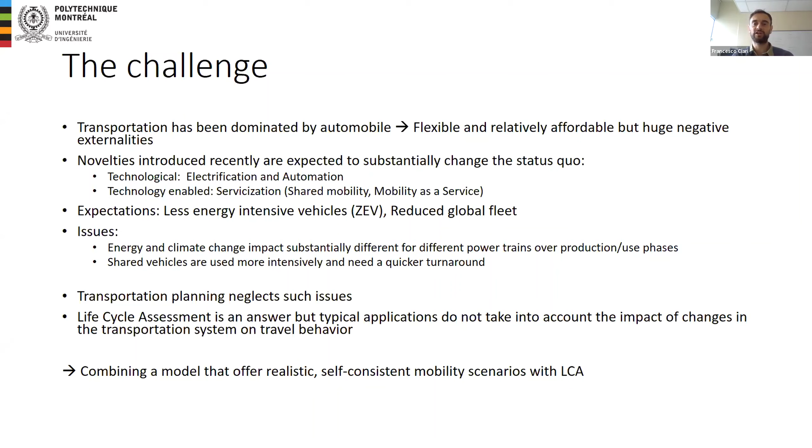On the other hand, we have something some of the audience is probably more familiar with, life cycle assessment, which is an answer to some of these questions, but typical applications in this field don't take into account the impact of changes in the transportation system and then on travel behavior. So the idea we had is to try to combine these two approaches. On the one hand, have a model that offers realistic and self-consistent mobility scenarios, and on the other, we have life cycle assessment.

So the methodology, more in detail. Basically, we start from a vehicle inventory. I got this term from LCA, but here it means really creating a scenario. Sorry. Okay. We create a scenario with certain types of vehicles with certain characteristics, and characteristics means obviously in terms of consumption, which was of interest here. Then we use a transportation model, and in this case it is an agent-based model, and I will explain in a second what it is, which is called MATSim.

And then we will have some results in terms of traffic flow and all these kind of things, and we'll put this into a life cycle assessment model. In the end, we will have individual impact, in terms of vehicles, and then we can aggregate both over a full, entire scenario, and also over time. I will explain what I mean by this.

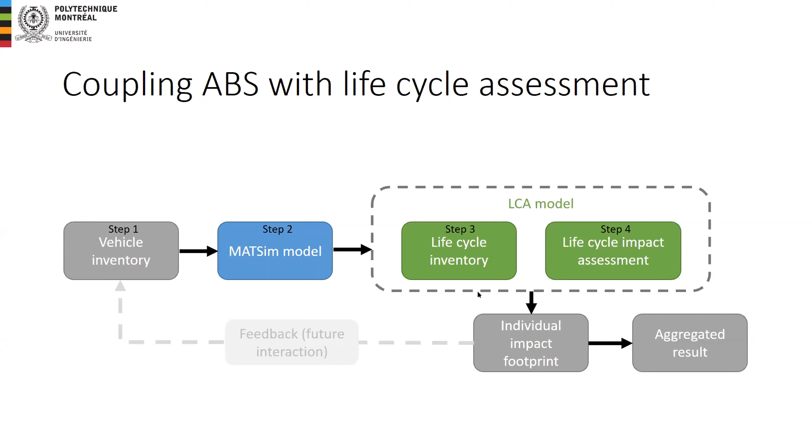All right, so here you see the main model. This figure describes better how this model is functioning. I don't think I really have the time to go into detail, but the important thing here is...

We are representing travelers at an individual level, with an iterative process within the model which allows individuals, described through this paradigm of agent, to decide what to do. Basically they have something available for them, meaning different mode options, and then they decide what to use according to what is good for them. In the end, we have an equilibrium, and this is what creates realistic and self-consistent scenarios in terms of transportation.

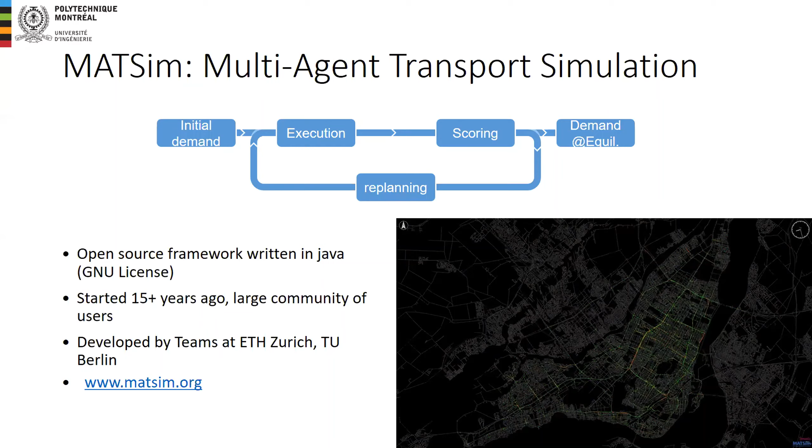Okay, then this was the transportation side. Life cycle assessment, let's say, it's something that is more well known, but in any case, very short.

I will remind people to please keep your microphone on mute. Would be a good idea, yes.

So LCA quantifies the environmental impacts of a product based on a cradle to grave concept, basically all the phases of the life of this object. I'm not going more into detail on that.

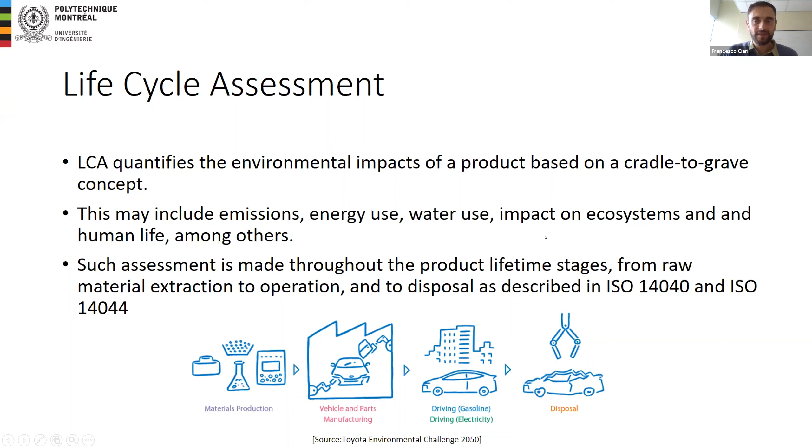So concretely, what do we do: at step one, we have this vehicle inventory, and all the relevant characteristics of the models that we use in a particular scenario. Then we have this agent-based simulation, and in the end we have a traffic outcome, and then we can calculate the consumption in terms of energy, the use-related consumption.

Then at step 3, we will add the other life cycle stages, for example manufacturing, maintenance, energy storage, etc., which is based on EcoInvent, which is an inventory especially conceived for that. In the last step, we can add it all up, and then multiply according to distances in the simulation and aggregate however we want, basically.

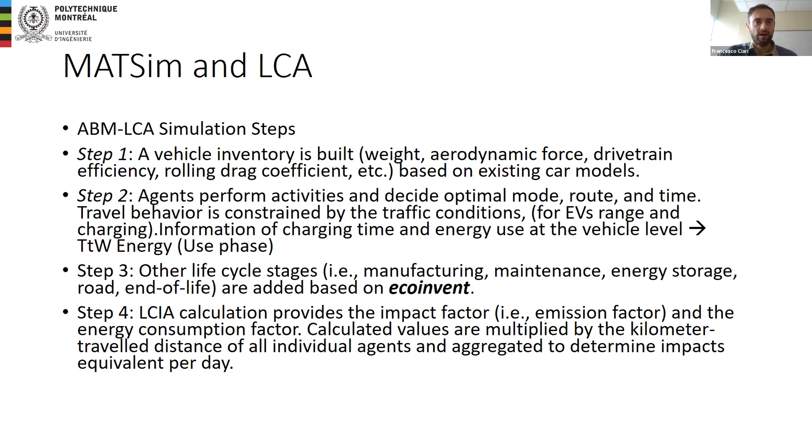Now, the scenarios we simulated for this particular project: we had 3, for the island of Montreal. We had a baseline scenario, which is the current situation more or less, because the latest data we had is 2013. We'll have soon 2018 - we are basing our work on travel surveys, and they come out every couple of years. That's how it works.

And then we had an EV scenario and then a shared EV scenario. I will give a few more details about those two.

So in the EV scenario, basically we checked, according to a certain realistic range for vehicles, how many of the trips within the island of Montreal were within this 150 kilometer threshold. Basically the large majority of them was within this threshold, so most of the people were assigned electric vehicles.

Then we considered just one model - for simplicity, we didn't have so much time here, but we can consider many different vehicles in the same scenario if needed, if we have time. And then we added charging stations, because obviously we are taking into account that cars are discharging and then need to be recharged.

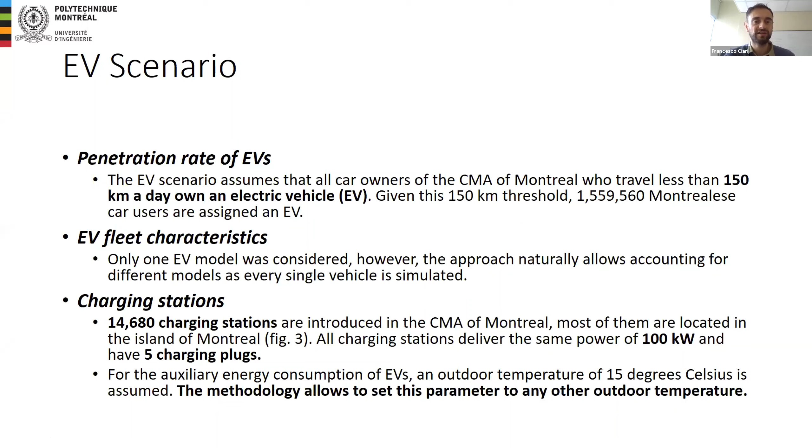Consider also that we had a particular temperature we considered, because it has a huge impact on the discharging, as I think you all know. But basically we can consider any particular temperature, even different temperatures over the day and this kind of thing.

For what I call here car sharing, the shared electric vehicles, we assumed more than double the real numbers in terms of car sharing membership for Montreal, and adjusted the car sharing supply accordingly. We had both two-way and one-way car sharing in the simulation. Here you can read the different characteristics of the vehicles, and we also based some of the network characteristics on Communauto, which is the operator here.

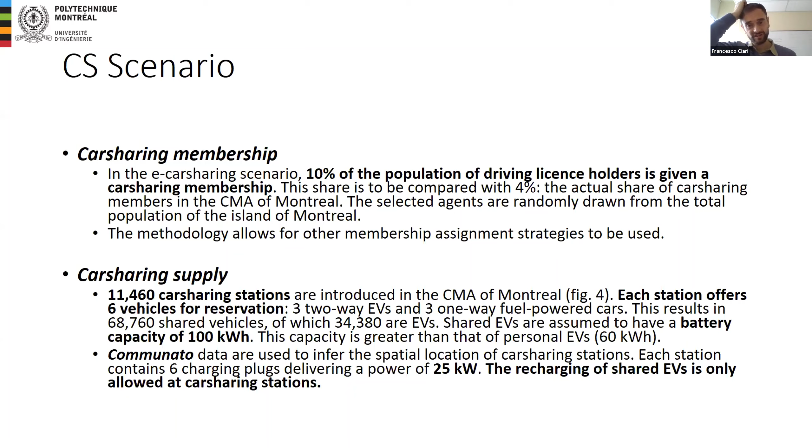All right, so some results. I think you understand with this kind of approach, you can have a lot of different results, also simply in terms of, I mean, on the transportation side. Here, I'm really showing only what's coming out of the LCA process.

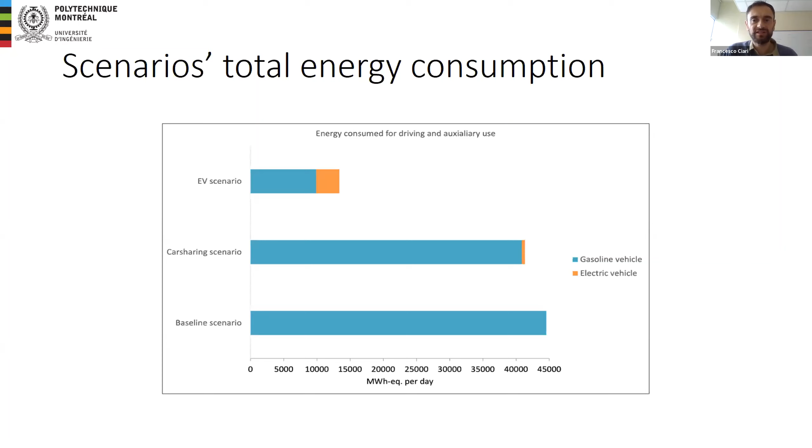So the first one you're seeing is the total energy consumption for the 3 different scenarios. What you can see here is that the electric vehicle scenario, as you are substituting basically almost all gasoline vehicles with electric vehicles, is the one performing better. Then you have the car sharing scenario, and then obviously the baseline scenario. I will give some more details on this.

If you go on a single vehicle level, but over the life cycle, that's what you have. So in terms of energy, here on the left, you can see gasoline, electric vehicle, and shared vehicle. Shared vehicle and electric vehicle are basically the same vehicle, but since over the lifetime the shared vehicle is used more, and we are considering 10 years of lifetime here just to do this comparison, obviously the shared vehicle has a lesser impact.

If I take out of the left side graph only the non-renewable part of the energy, that's what you see on the right. And here on the right is not only this, but also you have this for all the different phases of the life of the vehicle.

One thing you can observe immediately, as we all know, is that what is used during the use of the car, so during the travel, is the most important part for the gasoline vehicle, and is practically zero for the electric vehicles. But you have other phases which have a larger contribution for electric vehicles.

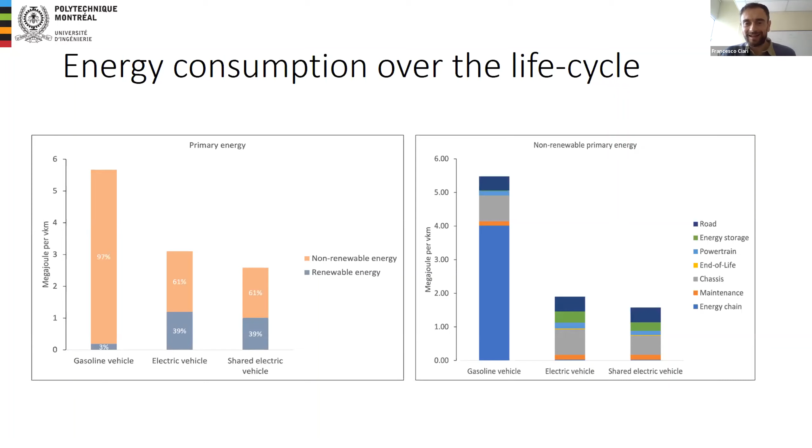All right, but up to here is just like a normal LCA, but with, again, in the back we have nevertheless this realistic simulation, which we don't normally have necessarily—never mind. An additional thing which is very important, and what I'm showing here, is that the previous graph was on the basis of these 10 years.

However, shared vehicles need to be changed quicker, exactly for the reason that they're used more intensively. And this is one of the reasons why I want to do all this, right? Here we see what is the impact of this on a single vehicle level over the 10 years if we change the fleet of the shared fleet every 2 years, every 4 years, every 5 years.

And so you see, obviously, you have a much larger impact. This is very important because, well, first because you need to do these kind of turnarounds, and this is really something that gets completely lost in the discussion usually.

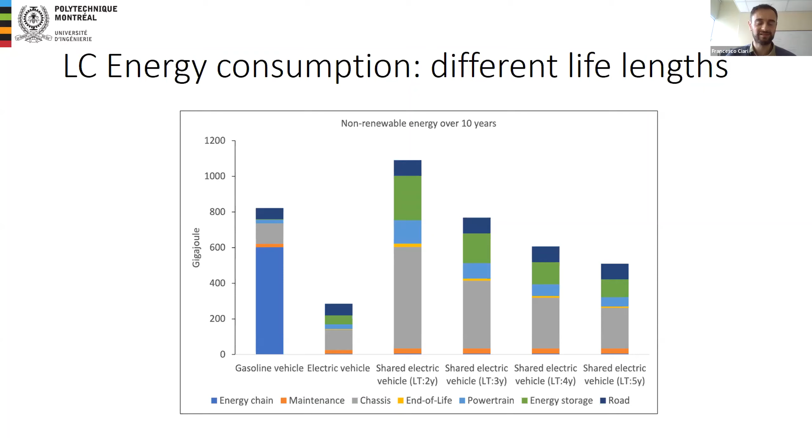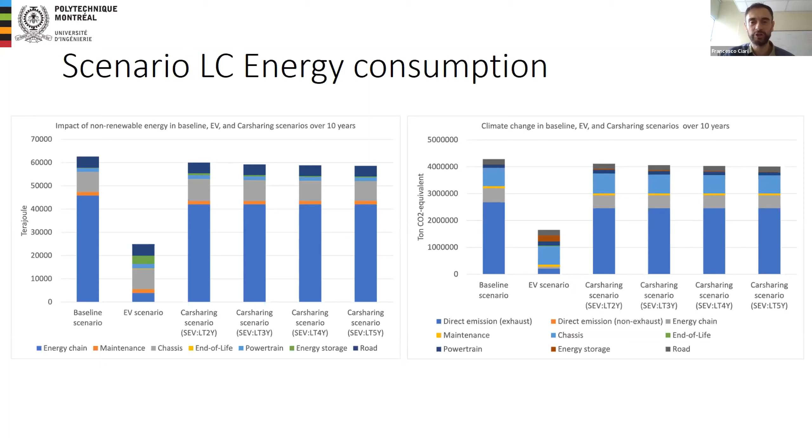If you go to the scenario level, the picture is very different. The car sharing scenarios we were representing still perform better than the baseline scenario, but obviously the EV scenario is much better still. Here you have both energy and also climate change. I'm not going into detail—we don't really have time for that—but that's obviously something you can do and usually do with LCA.

All right, so a short discussion. As I was saying, between the scenarios, the one with large EV fleets is the one performing better. The car sharing scenario, in a way, is just not extreme enough. I mean, what we are assuming is still 10%, meaning 90% of the people are still using their own cars. So if we have a higher substitution rate, it would perform better in absolute terms, definitely, and possibly even better than the EV scenario.

However, and that's where it comes again into play the fact that we have in the back a realistic simulation of the transportation side—it possibly limits the mobility of individuals. So it means that even if we make many more cars available than we did, they won't necessarily be used, or they will because they don't have alternatives, but this will be at the cost of the mobility of the people. The interesting thing here is that we are able to represent all this. So basically, we are representing all these trade-offs, with all the information necessary in the end to decide how to deal with them.

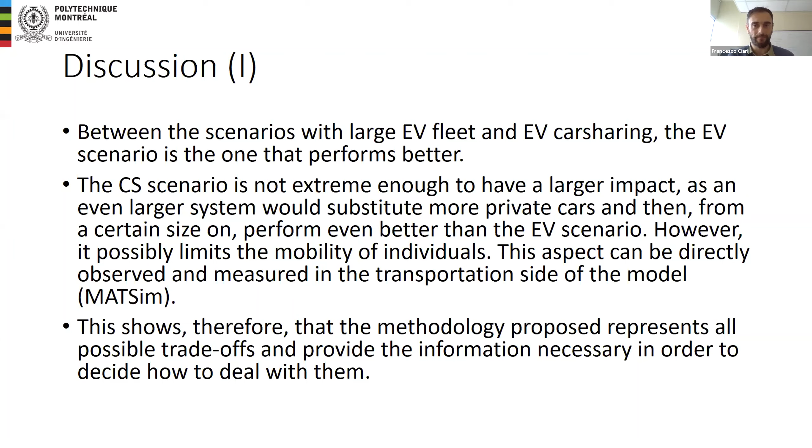The results demonstrate that this combined framework offers a fair and comprehensive assessment of future transportation scenarios. It's fair because it takes into account the implication of a possible larger diffusion of shared vehicles, the intensity of use, because otherwise it's completely unfair compared to the kind of comparison we routinely do in transportation when we talk about electric vehicles.

It is comprehensive because we account for all the phases of the life cycle, as LCA generally does. And it's based on realistic, behaviorally sound transportation scenarios. We explicitly represent individual constraints and preferences, and importantly, we also represent all transportation modes and how individuals can trade off among them. That's another very important point I'd like to stress.

So we would say that the tool should be important for designing and evaluating transformation pathways in the transportation sector—energy was the point here, but specifically for transportation. We show here all the impacts of different systems, and in the end this helps define what is the most desirable future. As we have seen, it might not be as obvious as we would expect.

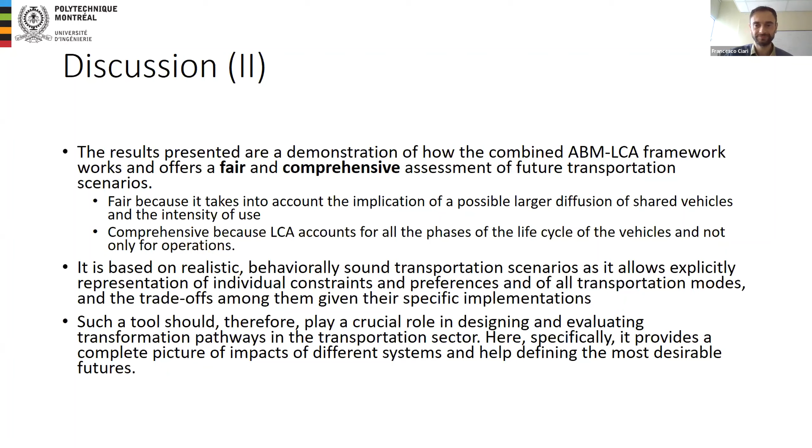So going back to the motivations in a short summary: we need a holistic approach to assess emissions and externalities in general—energy consumption and many others—in an ever-transforming transportation sector, especially since several parts of the system might change. We can't really evaluate the transportation system, which is complex with many different parts, many of which are changing or about to change, or that's what we expect anyway.

We cannot just take one of these aspects in isolation; we have to take all of this because they also have several interplays. Obviously we won't find a single model that captures everything. Our idea, as we showed here, is that this integration or combination of LCA and MATSIM, this agent-based simulation, is an important step in this direction, in our opinion.

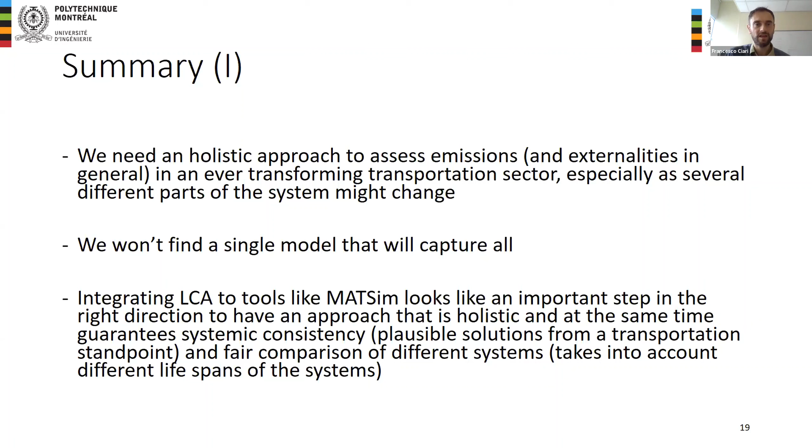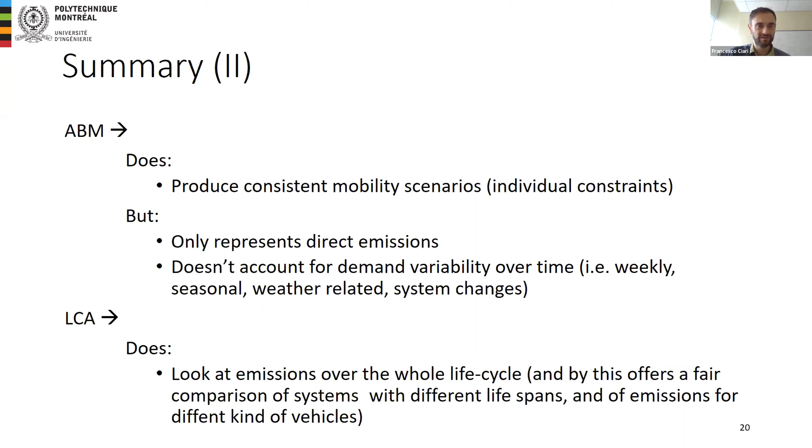I think I went through this already—what the agent-based model does and doesn't do, and what LCA does. So I just have the last slide here.

To conclude, what we can already do is use MATSIM, this agent-based simulation output, with travel details of the whole vehicle fleet for an average day, feed that into an LCA calculation tool, and do the kind of assessment we just showed.

What we're trying to do in the future, on the simpler side, is create several MATSIM scenarios for different situations, because right now it's just an average day—but obviously over 10 years you don't just have an average day, and the definition of average itself we could talk hours about. So we want to go into more detail on days of the week, seasons, and the transformation path of the transportation system over time.

And modify the tool in order to have a more accurate LCA—one that takes into account all this difference over this span of 10 years.

Then the next thing, which is much more ambitious, is trying to extend the model to energy consumption related to other human activities. Since MATSIM basically provides daily plans for each individual, we simulate transportation based on the reality that people move around mainly in order to perform activities at different places. Now, these activities obviously are also what create energy consumption.

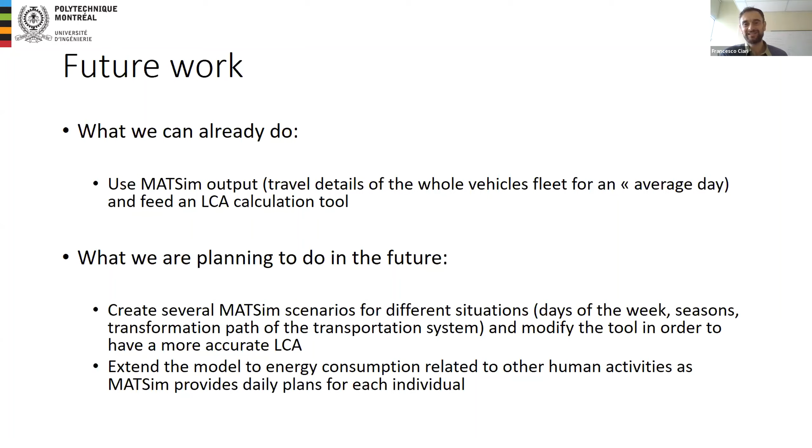What we do here is, obviously because we want to simulate transportation, we have a very simple but still complete representation of human activities over a day. So we have to connect many dots here, and we need to add many sub-models.

There is a question in the chat, I think. I'm trying to find it. Yeah, okay.

Did your simulation model determine what will be the ideal percentage of shared vehicles that will make the scenario more energy efficient? That's the jackpot question, as Claire Isabel asked. Yes, that's a very relevant question.

For now, no, we are not. It was kind of tentative for the moment, also because you have to consider that this kind of simulation is computationally very costly. So it's difficult to really optimize in terms of scenarios. You get an idea of which direction you should go, but to really optimize, strictly speaking, it's difficult. But obviously, yes, it's a very relevant question.

I'll go to another one, from Eloise: what's the difference in lifespan between car shared and individually owned vehicles?

On the basis I showed at the beginning, it's the same, so 10 years. If the question is about reality, in reality it's like a bit less than half the life of a private vehicle. That's more or less the data I have. In reality, it's not something you easily find, but talking to operators, more or less they have a 3 to 4 year turnaround.

Okay, so thanks everybody for tuning in. My name's Cameron Wade. I'm a PhD candidate at the University of Victoria, working with doctors Peter Wild and Andrew Rowe, and we work out of the Institute for Integrated Energy Systems there.

Today I'll be talking about an ongoing project that's really about exploring the near optimal solution space of power or energy system optimization models. I'll give a little introduction and context to electricity system or energy system planning problems and some of the problems they currently face. Then we'll talk about a methodology called modeling to generate alternatives that can systematically look at near optimal solutions. That's really the heart of what we'll be talking about today.

Then we'll talk about the model. There are two separate pieces to that: the modeling to generate alternatives model or methodology, which is kind of separate in and of itself, and an energy systems model of Western Canada that serves as the case study or application of the modeling to generate alternatives approach. Then we'll spend some time going over the results, not so much analyzing them as an energy systems model result, but showing what modeling to generate alternatives can bring to bear on this type of analysis. We'll wrap up with some concluding remarks.

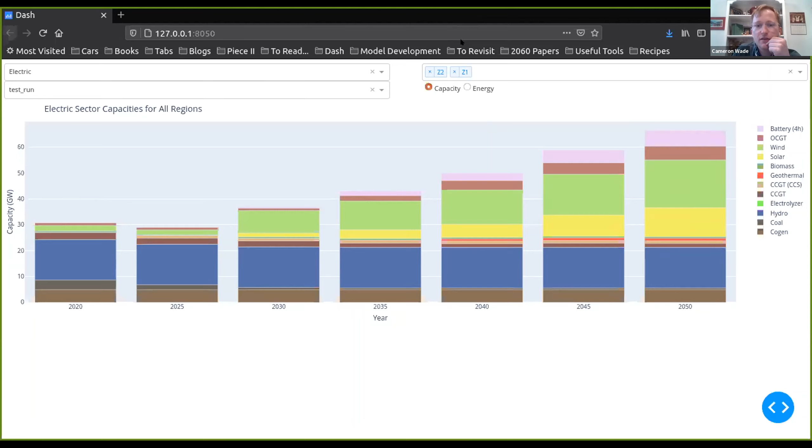Excuse me, Cameron, I think we don't see the right screen. We see just a single graph right now. Interesting, I'm going to have to stop sharing and reshare. Oh, here we go, sorry, it's interesting, it doesn't do screens—it does. Okay, sorry about that everybody. This is all you missed, not a whole lot. So this is the page we were on.

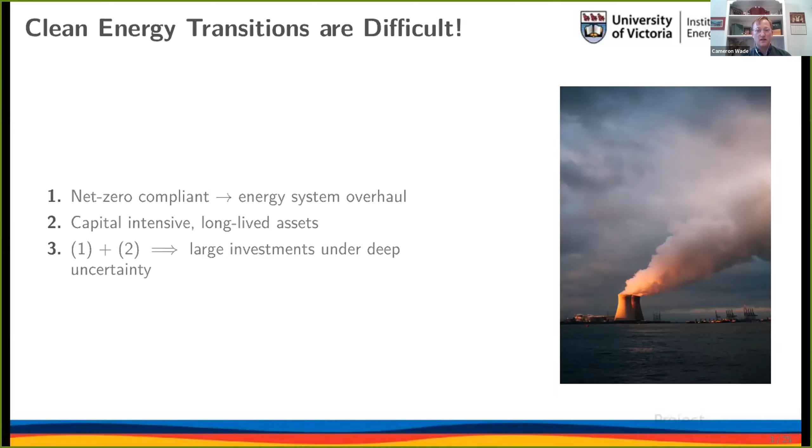Apologies. Right, so this transition is going to be difficult. There's likely going to be an entire energy system overhaul required, and a lot of that is likely going to take place in the electricity sector as more and more end uses are electrified. What we do know about the electricity sector is that it's full of capital intensive and long-lived assets. These two points together imply that today there are going to be lots of large, sizable investments that have to be made under deep uncertainty. That's the problem facing us.

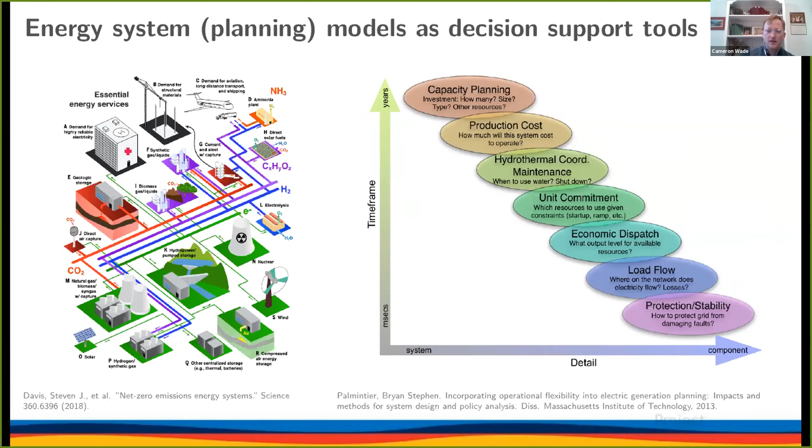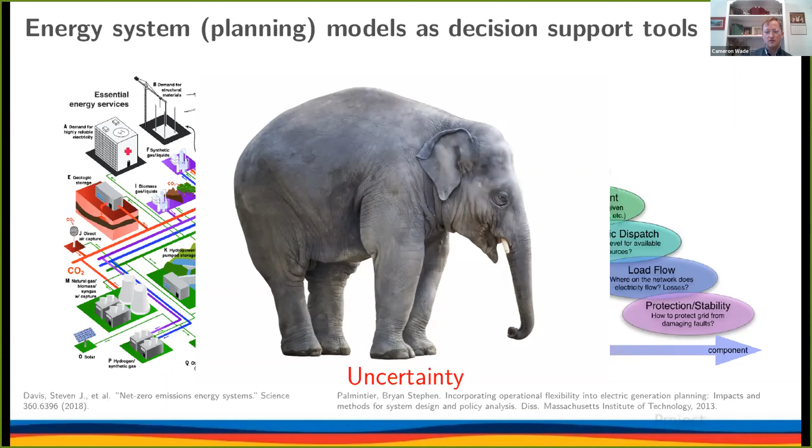But in this, there's kind of the elephant in the room, right? We don't see on these past two diagrams anything about uncertainty, but we do know, if we're going to look 30 years into the future, there's tons of uncertainty that we're facing, and that we're going to have to somehow either ignore or choose how we incorporate into our models and our decision-making processes.

And so when it comes to addressing uncertainty in energy system planning models anyways, it's nice to partition uncertainty or separate it into two forms. On the one hand, you have parametric uncertainty. So this is just uncertainty in things that we simply cannot know. So the future costs of natural gas or other commodities or investment costs required for wind, solar, whatever it is, or what the future weather climate is, or geopolitical relationships, anything like this, right? That's all considered parametric uncertainty.

And there's lots of great methodologies to deal with that, whether that's stochastic optimization, if we're able to at least determine what the distributions of these sources of uncertainty are, or things like Monte Carlo simulations, sensitivity analyses, method of Morris, stuff like this.

Separate from parametric uncertainty, though, we have structural uncertainty, which is kind of the manifestations of mathematical abstractions. So we know many of these planning models are formulated as linear programs. And I studied math, and one of my favorite quotes is, separating things into linear and nonlinear phenomena is like separating the world into bananas and non-bananas, right? So we're constantly making assumptions in trying to linearize things in this case, and so we're losing some reality when we're doing that.

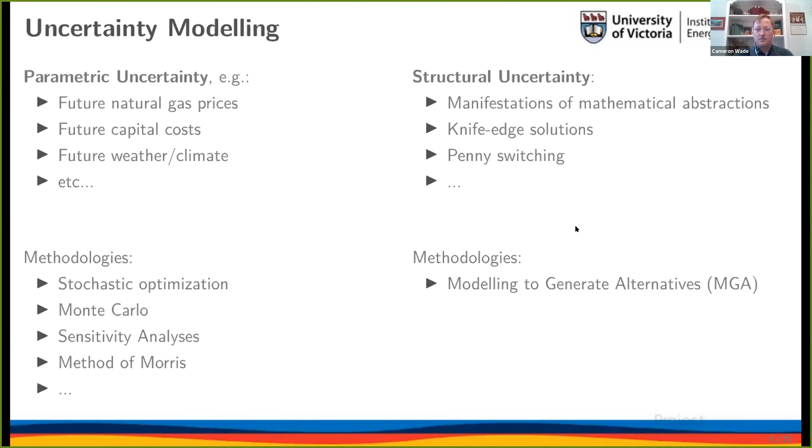And so what it is, it's essentially a systematic methodology to navigate the near optimal solution space. It first solves the optimization problem, so in this case, say an energy or capacity expansion problem. And then from that, it defines a near optimal solution space. And then it explores that space for different solutions that are not necessarily optimal, but close to optimal, and they could be really distinctive by some metric.

And so the intention then is not to get a singular optimal answer per scenario. It's instead to extract a portfolio of alternative solutions that exhibit the degree of flexibility in the model solution. And so an application is to elucidate to energy system planning stakeholders the breadth of possible futures that exist within, let's say, negligible cost differences for a given scenario.

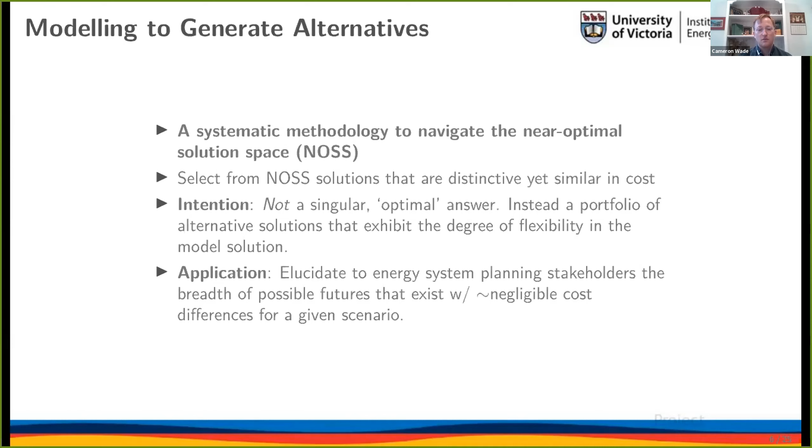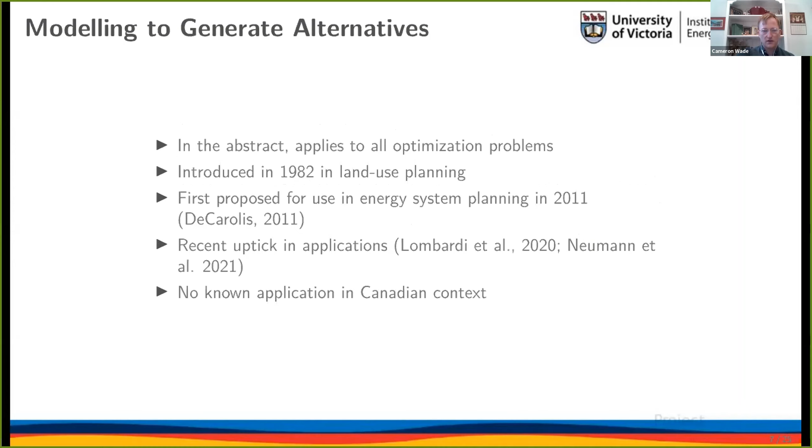And so in the abstract, it applies to all optimization problems. I'll get to that in a minute. The method was introduced 40 years ago and has recently started to be applied to energy systems or power systems planning problems. But as far as I'm aware, there's been no application in a Canadian context as of yet. So let's talk about the model.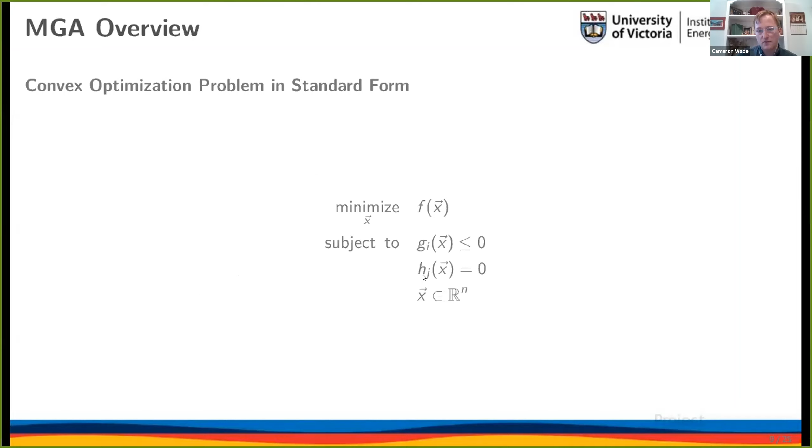Simply put, this will be pretty high level. Energy systems planning models tend to be optimization models, and in the most general sense, this is the canonical form for a convex optimization problem. You're minimizing some function f, which is assumed to be convex or linear, subject to some family of inequality or equality constraints.

So what MGA, or modeling to generate alternatives, does is a three-step process, where the first is solving this original optimization problem. The second step is defining a near optimal solution space by using the optimal solution of the original problem as an anchor point. And then the third step is to define a new objective function or a search direction to select new near optimal solutions in that near optimal space. And then you can iterate a number of times to select different interesting solutions.

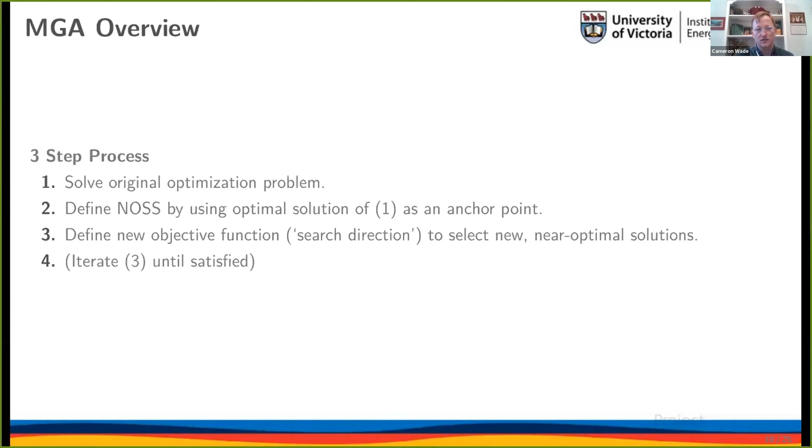And so graphically, this is kind of what it looks like. So you can imagine here's an optimization problem. You're trying to minimize the value of f of x, say, and it spits out the optimal solution of x star with f of x star as the minimal, say, cost in this case.

So what we do, the second step, if you remember, is encoding a new constraint on the MGA problem by essentially taking the previous solution and encoding that as a constraint. So what we see here, a little bit mathy, but I'm not sure if you can see my mouse or not, but in this constraint in the boxed problem, the f of x minus 1 plus epsilon f x star less than or equal to 0, that corresponds to this dashed kind of bronze bar in the problem.

And so that essentially imposes two new constraints, these bronze vertical bars that kind of limit the solution space of this updated problem. So now what this updated problem is saying: okay, let's minimize some totally separate function, m of x, subject to this new updated set of constraints, all the same old constraints, but with a couple new constraints that essentially anchor or define this near optimal solution space.

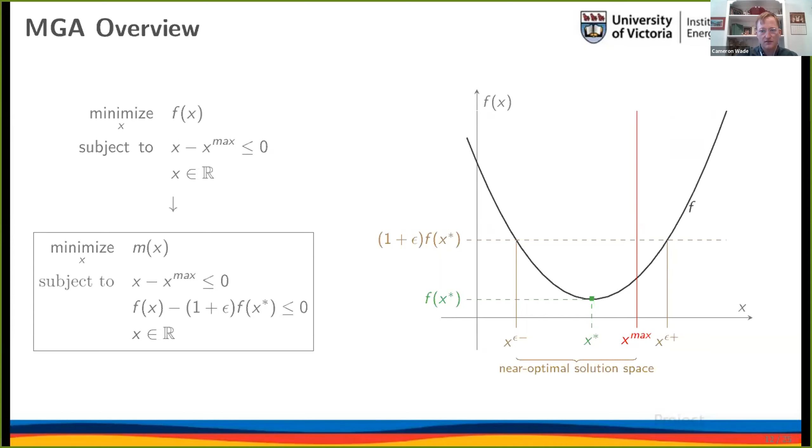And then once you have that defined, you can define m of x, your new search direction. So in this case, you can imagine, okay, let's minimize x in this near optimal solution space, and then your new optimal solution would be x epsilon minus. A little bit abstract, but I think it might be instructive to understand the theory of what's going on.

So we applied it to an energy systems planning model that I won't really get into detail. It was based off these two studies that I provided on the right. Essentially it's an energy system, or more or less a power system model of Alberta and British Columbia, their current systems going out to 2050, and a really loose policy scenario, just the current federal carbon tax and a mandate to electrify the entire road transportation fleet of British Columbia by 2050.

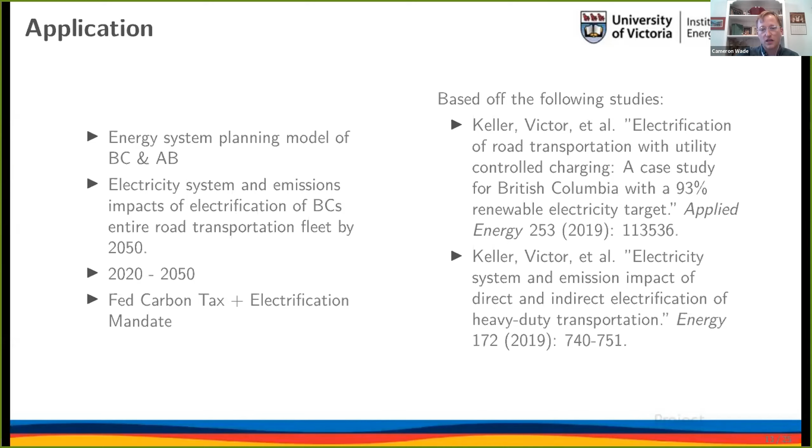And so, there's lots of information about that model, but that's not really what this MGA presentation is about. So interested readers can read the report or look at these two studies for even more detail of how those studies were set up. But briefly, to give you an idea, here's a template or a schematic of the energy system we're talking about. So this is the combined BC-Alberta system.

So essentially, there's an array of energy sources that get fed into or consumed by transformer technologies, in this case mostly power generation: hydro, biomass, a bunch of thermal generators, and so on. What I will say is that each province is represented by one node, but there's 7 wind resources available in each, and I think 4 solar PV resource sites in each to get a little bit of spatial variation there.

And so, that produces electricity, which can meet conventional electricity demand, or the electricity demand coming from the electrification of the transportation sector. And really quickly, how the electrification of the transportation sector worked is that it was an exogenously defined conversion from the current status to 100% electrification of medium, light, heavy, and passenger vehicles.

I won't get into too much detail there, but what's important is that for the medium and heavy duty transportation, it's assumed to have a flat load or a static load, so its charging profile is flat throughout the day, whereas passenger vehicles and light vehicles follow a typical daily charging profile, just taken from literature.

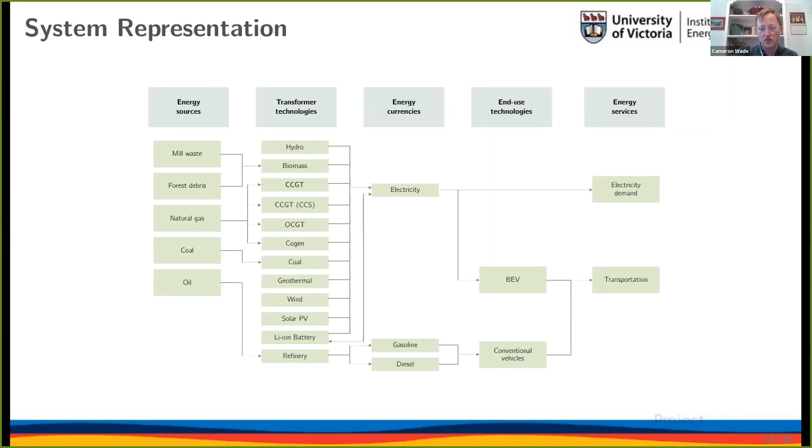Okay, and so how are we applying MGA, or modeling to generate alternatives, to this application? What we want to do is find solutions to this energy system optimization problem that are similar in cost to the optimal solution, but really differ in system composition and operation. And so what we're going to do, starting on the right-hand side here, is we first determine a search direction for this MGA method. So that was the M of X in the little MGA schematic.

And we decided to minimize or maximize the total activity of the following groups of technologies: wind, solar PV, battery, gas turbines with or without CCS, and transmission. And those are all done separately. So one MGA scenario, for instance, says, okay, let's search in the near optimal solution space in the direction that maximizes total wind generation over the 30 years in question.

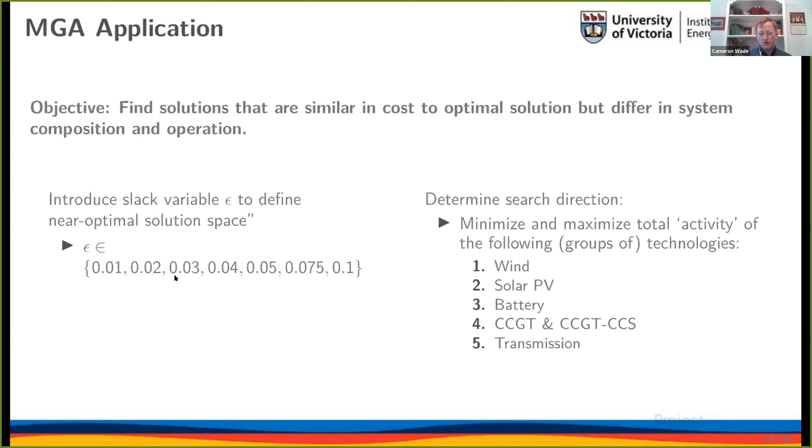And that's done for a number of what we call slack variables. So essentially the slack variable just translates into what percentage premium we are willing to increase the total system cost. So we do that for, say, 1%, 2%, 3, 4, 5, 7.5, and a 10% premium.

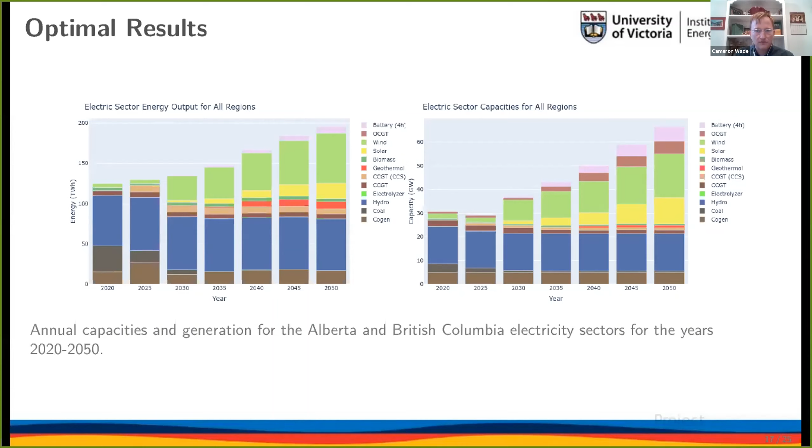And you're probably asking, why is there curtailment if there's dispatchable hydro there? That's because there's certain rules for the hydro. There's some must run, there's run of river, and there's a total energy budget that has to be obeyed over the year. So that's why hydro isn't as flexible as you might think it would be. What else do we see?

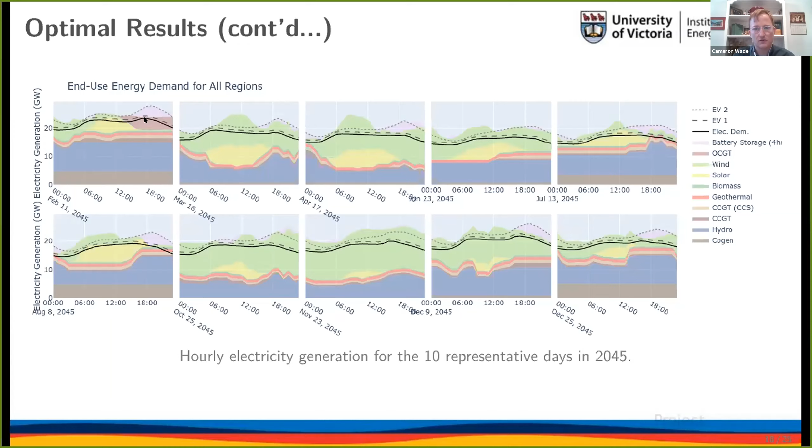We can capture the use of peaking resources by using this representative day format. If we look at the top left, February 11th, we see that there's a terrible wind and solar resource, at least in the evening. That's when we see the battery being dispatched to meet the evening peak, and the open cycle gas turbine to meet that evening peak as well. And that's actually the only time of the year that it's dispatched, which is consistent with intuition.

But that's really because of a few reasons. First is that solar PV is substituting other technologies that have much higher capacity factors. There's an increase in system losses because there's lots more electricity running through batteries, which have an 85% round trip efficiency, and transmission.

There's increased levels of curtailment in this type of system, and solar PV provides nothing to the reserve margin. So the system still needs to build other technologies to meet the reserve margin constraint.

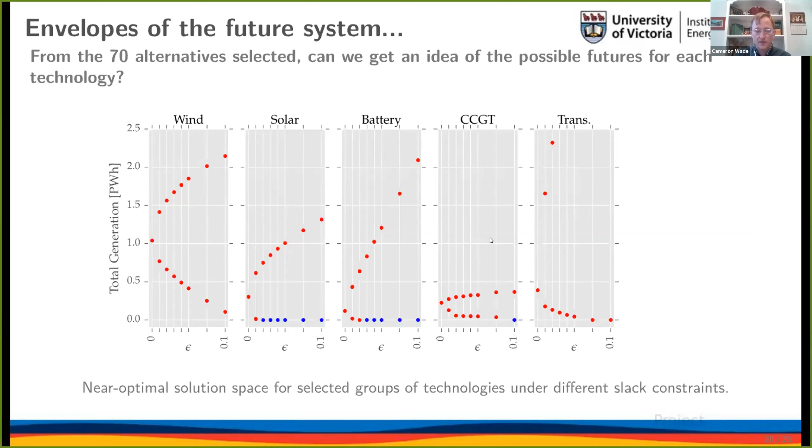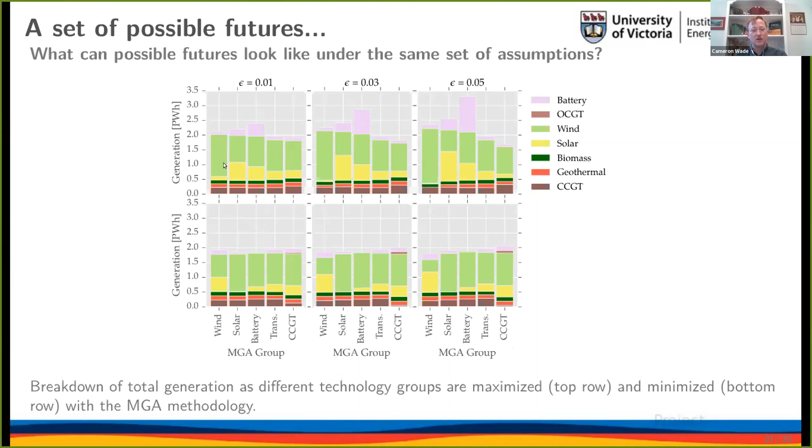In the interest of time, I think I might skip this plot, but if you'd like to look afterwards, it gives you a whole bunch of different possible futures of the energy system composition at different cost premiums and search directions. This will give you a flavor of what's possible. But I'm skipping that just to get to this figure.

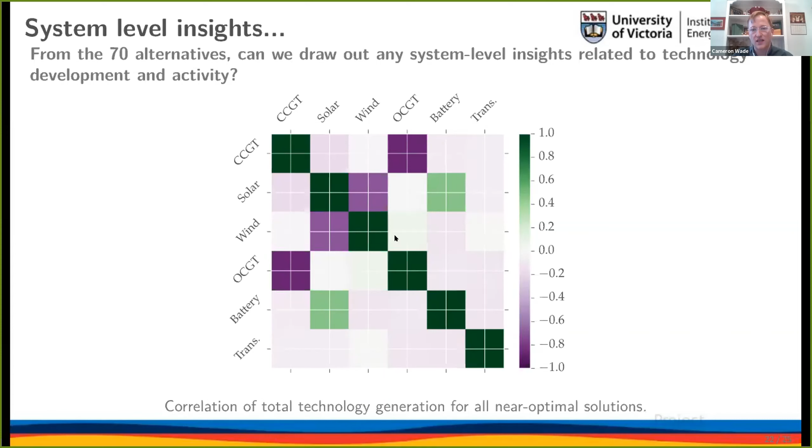Lastly, we see a couple more interesting bits where there's a slight negative correlation with wind and battery, which indicates that wind probably needs longer duration energy storage to balance its intermittency, so there's not really a strong correlation between storage and wind in this case. But what we do see is a slight positive correlation with wind and transmission, which indicates that transmission can actually come in and balance some of wind's intermittency.

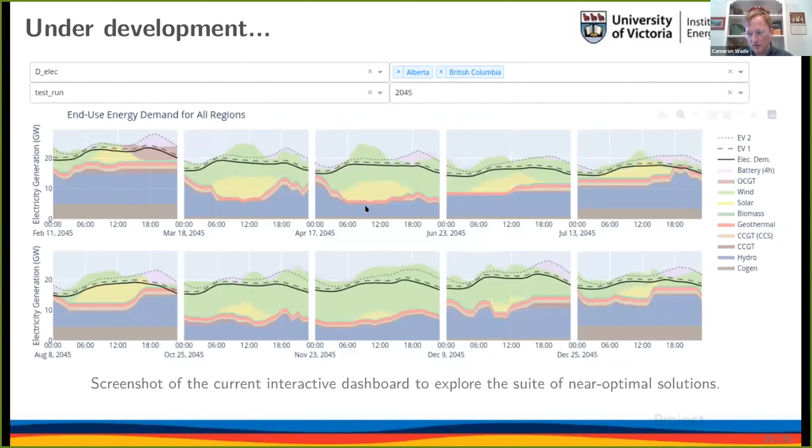So briefly wrapping up, where are we? Well, it's currently under development. I was hoping to pull up a web browser—this is just a screenshot from an interactive web browser where you can go through all the plots, get different information, zoom in and zoom out, and so on. That's currently under development.

Insofar as concluding thoughts, I guess I got to be quick here. Essentially, what policy gaps does this fill in terms of usability for policy design? We really hope that this type of analysis can illustrate to energy system planning stakeholders the portfolio of opportunities that exist.

So you give one single scenario or set of input assumptions, and we can look at this broad portfolio of system compositions that are really, really similar in cost. And taking into account the parametric uncertainty, they're essentially all the same cost. This is good because it gives an indication that for the set of assumptions, we're not destined to this one particular path. There's actually quite a bit of variation on the path we can take.

Quickly, the benefits from being integrated into a national modeling platform: one benefit is that the modeling to generate alternatives methodology is not tied to a particular model. I used it on a model called Temoa, similar to TIMES or MARKAL or OSeMOSYS or something. But it can be seen as a separate model that can be plugged onto different types of models, be they capacity expansion, transportation, land use planning, or what have you. It's just a way to explore that near-optimal solution space and give people an indication of what's a possible future, or what's the set of possible futures for this input scenario.

So I think that puts me at around 25 minutes. I'll stop there, but I'm happy to go back and answer any questions.

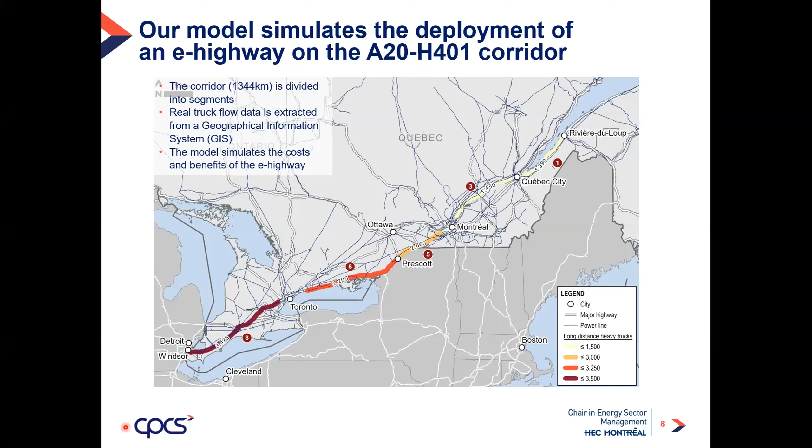So the model we use is a techno-economic model for the eHighway, a scenario for deployment and adoption in the industry. As an output, we get the costs, both in terms of investment and operations and maintenance, including the cost of electricity. And on the benefit side, we get important savings on fuel, to which a value can then be attributed.

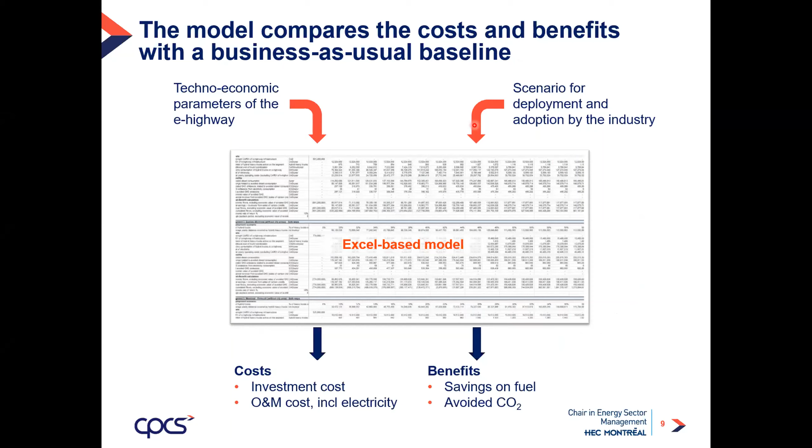So the economic analysis we've used for the eHighway is centuries old technology, but its application to highways is relatively new. So we turned to the literature to give information on the technology and its key parameters.

In terms of electricity consumption on the eHighway, we found numbers ranging from 1.2 to 1.9 kilowatt hours per kilometer, and we selected a median assumption of 1.5, considering that the corridor we're looking at does not present any specific challenge. So we think this median number is a good approximation.

The infrastructure cost is really a complex question. In the literature, we found costs ranging from 2.4 million Canadian dollars to 4.8. The difficulty is that there are different ways of configuring the eHighway that correspond to different truck flows and different functionalities. For instance, the highest number corresponds to an infrastructure that can accommodate extremely heavy truck flows, much heavier than what we have here, so it would be too much for Canada.

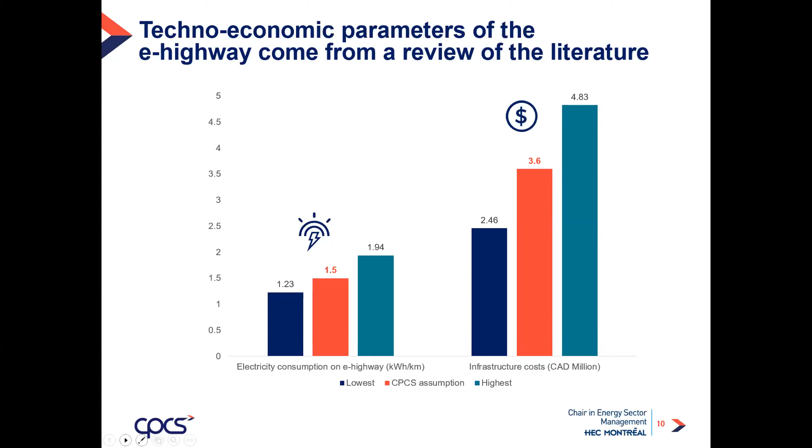We had other parameters being used for the simulation, and as Joanne mentioned, we had the relatively bad luck to be notified that one parameter was wrong, which had a direct impact on our results. We were made aware of this only this morning, so we were able to update our results very quickly, but the results I'm going to present now haven't gone through a thorough review process due to the need to update them so quickly.

So we ran a number of tests using a simulator. The first test assumes that the entire heavy truck flow from Toronto to the US border switches to eHighway, and we look at the payback periods of the infrastructure. The simple payback period is simply when the savings totally pay back the infrastructure investment.

With the value for the avoided ton of CO2 ranging from $50 to the maximum of $170 from federal policy, we see that the payback period for the entire corridor can go from approximately 10 to 20 years, which isn't bad for a large infrastructure.

The payback period is significantly better from Toronto to the US border, where the truck flows are significantly higher, and the payback is much longer for the most northeastern part of the highway, from Quebec up north, which is less relevant for the technology.

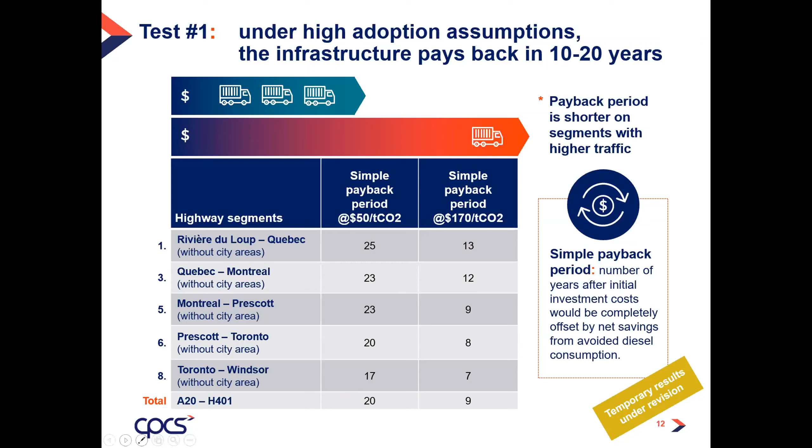The second test we ran was to try to simulate something more reasonable in terms of technology deployment. So let's assume each highway segment will be electrified one after the other, starting with this one from Toronto to Prescott, that's close to Ottawa, then the one to the US border, and then going up north to Montreal, and then Quebec City and Rivière-du-Loup.

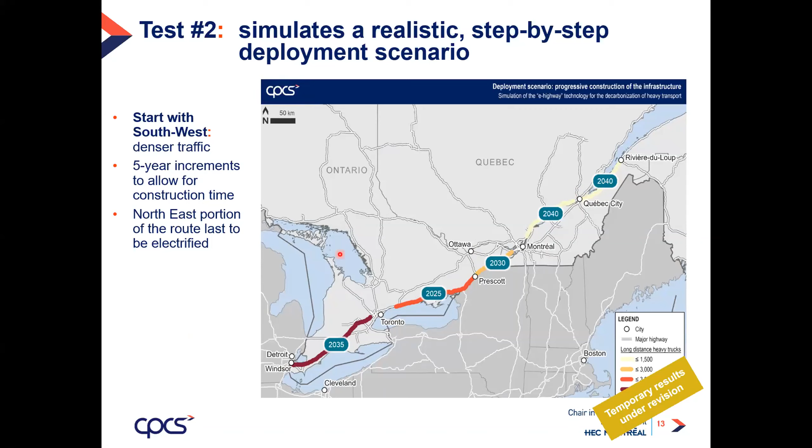We also made assumptions on adoption by the end industry, trying to be realistic. In the first years, we have just a few hundred heavy trucks switching to the technology, corresponding to 0.4% of the current existing truck fleet. Then as the infrastructure is deployed, we assume adoption goes up and up, reaching in the end something like 13% of the heavy truck fleet from Ontario plus Quebec. And in this configuration...

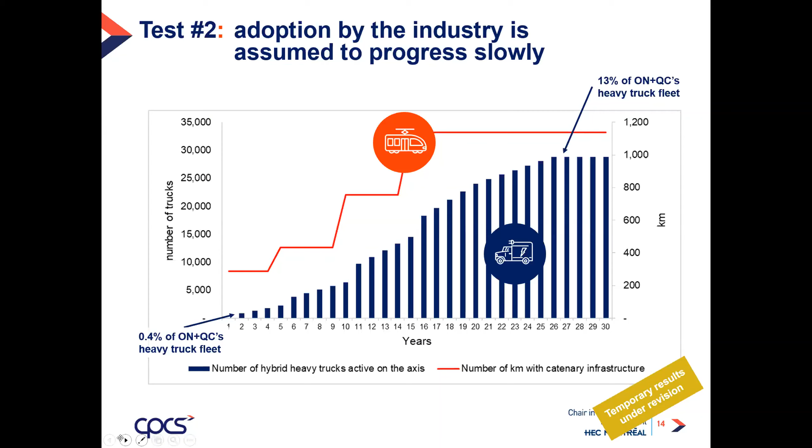We have an investment of 4.1 billion to build infrastructure and 1 billion for the trucks. This 1 billion is the comparison between a truck equipped with a pantograph and a small buffer battery to use the eHighway, versus a regular diesel powered truck. In terms of benefits, we have GHG emission reduction of 2.5 million tons of CO2 equivalent, and savings on fuel of a bit more than 300 million.

And we check what the economic internal rate of return of the infrastructure is, taking into account those investment costs and benefits. We find that as long as the value of a ton of CO2 is above $85 per ton, the rate of return is positive, and it reaches 5% under the assumption of $170 per ton of CO2. 5% is not extremely high, but again, for that kind of infrastructure it's not totally unreasonable.

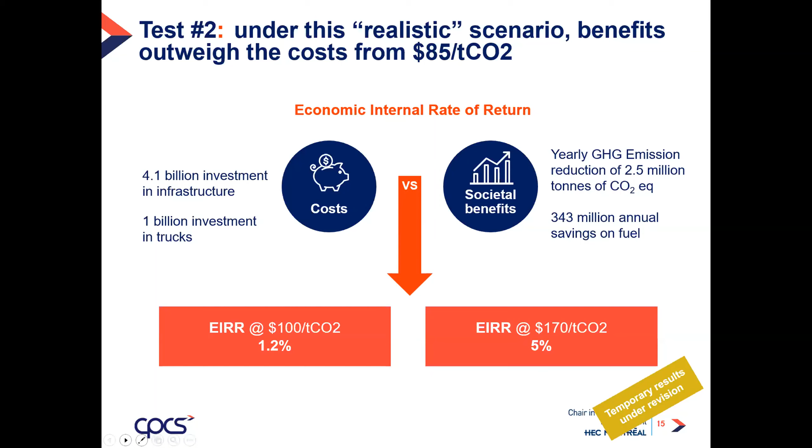The last test we ran was to check how sensitive the results are to various parameters, because we are studying a technology that is not yet commercially deployed. So it was important for us to understand how uncertainty on some parameters impacts the result. What we find is that the cost per individual truck, the cost of electricity, and the operation and maintenance of the infrastructure do not have a major impact on the results. But what does have a major impact on the economic viability is the cost of the infrastructure and the rate of adoption of the technology.

So in conclusion, one major uncertainty we have right now is the adoption of the technology. Is the industry interested in switching to the eHighway? We see that there are many advantages in doing so, but will it be compatible with the trucking industry's own constraints and operational parameters? We also need to make sure that it is indeed relevant for the heavy truck industry.

One thing we have not included in the simulation is everything that relates to financing structure and financing cost. Who pays for the eHighway? What's the cost of financing? This of course has an important impact on viability. Another closely related parameter is how the benefits are shared between the infrastructure provider and the trucking companies that will use it. A truck that uses the eHighway, how much will they have to pay for using it, and how will they contribute to the initial investment cost? This will have an impact on the adoption rate by the industry.

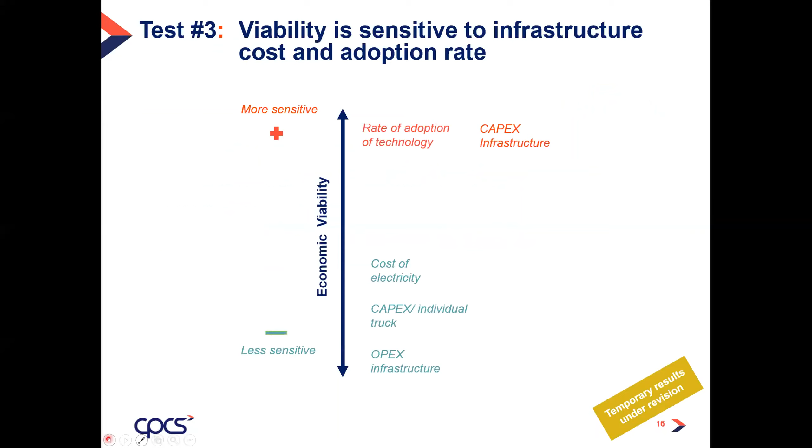Well, no, that's a good point. I have not experienced the light rail system in Toronto. I personally come from France, where we have a lot of electrified trains, and we don't experience that kind of problem with the pantograph. So I'm quite confident that a properly designed pantograph for eHighway would not run into that too often. But more generally, there are pilots going on, and that kind of question can be answered with the results from the pilots that are not yet published, but we're expecting them, and we will analyze them whenever they're available.

Yeah, thank you. And I'm quite sure that the Toronto tramway doesn't have any internal storage capacity, so that's probably why it stops often. Any other question? We have a minute and a half still.

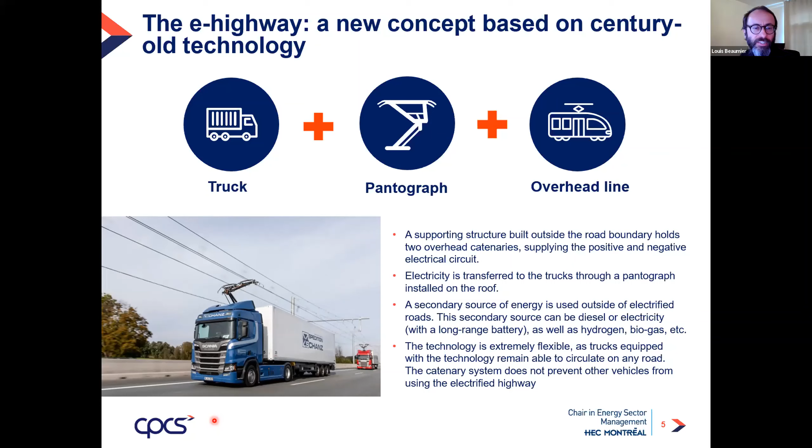Well, I would have one. How would the energy be billed, knowing that we would go from one province to another? So would that be two separate systems for the billing? I mean, that's exactly a super interesting question that we have not considered in our simulation right now, because we were looking at the overall benefits for society. Moving forward, if there's technology, who pays for what is clearly a key question.

I'm not an expert in toll road systems, but I think modern technology really allows monitoring extremely precisely where a truck is and when it is using electricity or not. So I imagine it's relatively easy to know which electricity from which system a truck is using and to bill accordingly. Yeah, just to add, that's exactly right. I think it's going to be a question of putting something in the metering that will be part of the truck. And actually, Patrik Akerman, who is leading the Siemens eHighway program, is dealing with all of these issues in the European context. So if there are more technical issues at that level or about the trucks, I invite you to write to him.